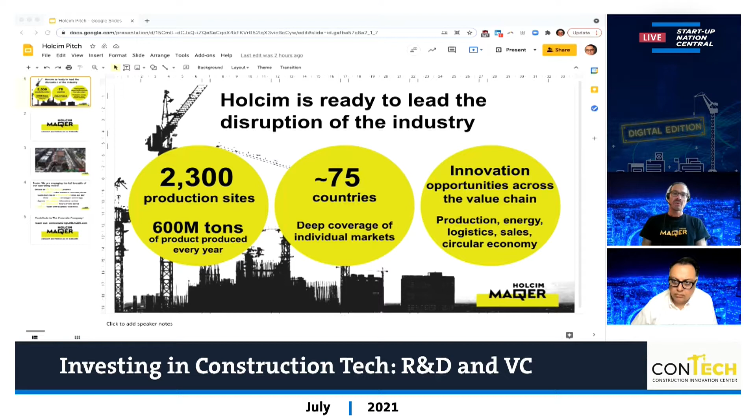We can only solve that challenge if we build greener, smarter, and for all. As Holcim, we are well positioned to disrupt how the construction industry will build in the future. With more than 2,000 sites globally and representation in more than 70 countries, we cover the full value chain - from the quarry to the cement plant, the whole supply chain to the construction site.

With this, we are convinced that we can drive the innovation of the construction industry. Now, Pritesh, share with us what you think about open innovation.

Thank you, Bengt. Appreciate that. I think it's one of the key reasons why we at the company have established the MAQER unit, the Holcim MAQER unit, as we talk about. The idea behind the Holcim MAQER unit has been primarily to create a platform for members of the open innovation community to really engage with us on a very active basis.

What we've done here is rather than being a venture investor or a corporate venture arm that you may see in other large corporates, it's really to flip the model to become more of a venture client model, where we bring the vast scale that Bengt was just referring to, the large global footprint that exists within our network, and make it available to startups and innovative new solutions to help address the most pressing challenges within the organization. It's a way for these small startups or emerging players in various different areas to really be able to affect the entire industry rather than just one player.

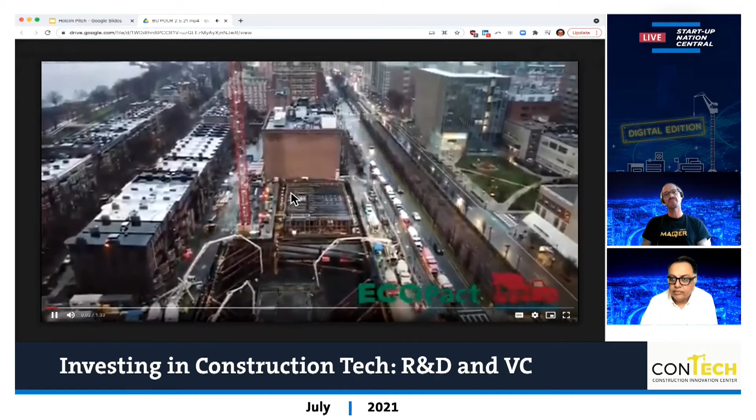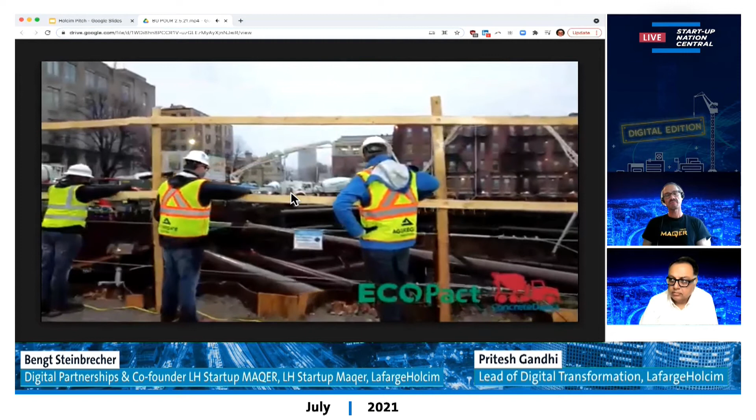We are here in Boston, Massachusetts, on the campus of Boston University, on one of the busiest streets in Massachusetts, on a very rainy Saturday morning. And it is a very large, more than 4,000 cubic yard pour of the ECOPact mix.

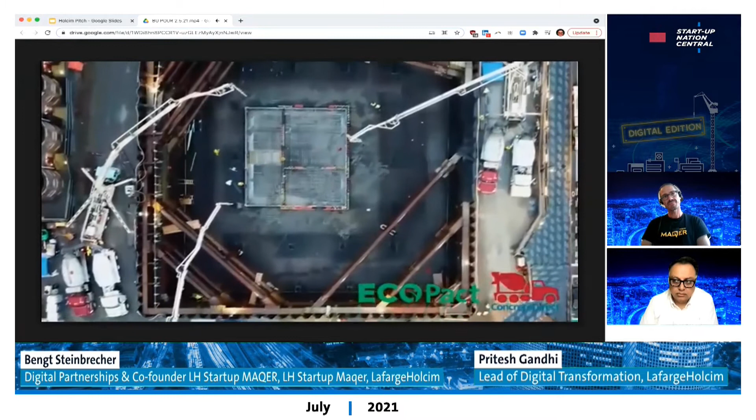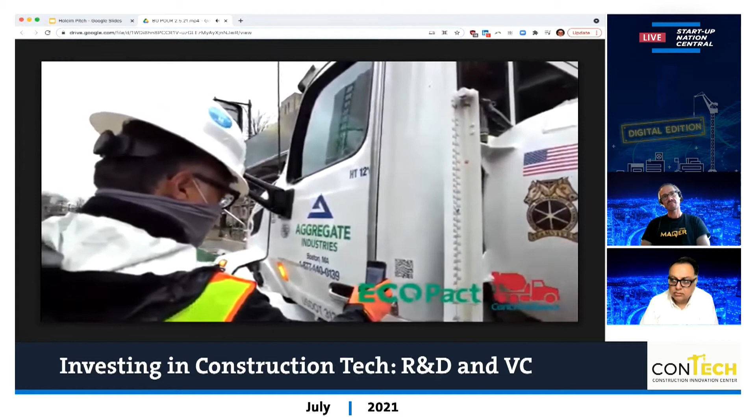With process and product innovation, we are able to make this one of the most sustainable pours LafargeHolcim has ever done. We have connected all of our back-end systems digitally, directly with the customer. So at their fingertips are every ticket, every truck, every status of every truck to ensure that concrete is delivered in 90 minutes or less.

Concrete Direct allows every one of the stakeholders to have their own view of each individual truck to allow them to perform their tasks independently and safely on a job site like this.

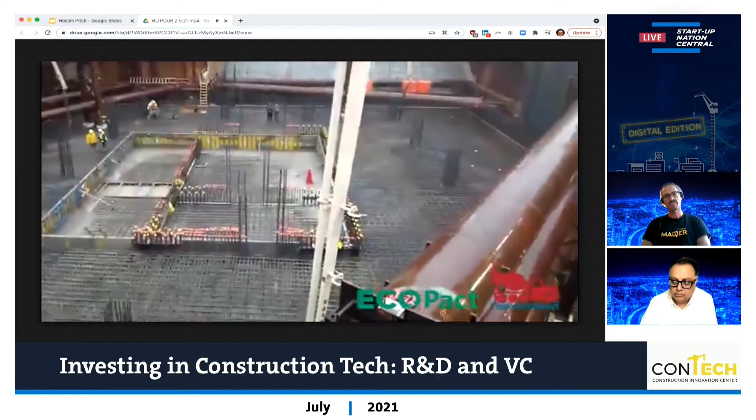At LafargeHolcim, our commitment to a sustainable future is stronger than ever. We are very proud to couple both product and process innovation at the Boston University Data Science Center. With ECOPact, this site has the lowest carbon product available as of today. And with Concrete Direct, the entire process was digitized without any paper whatsoever.

I think this is really a super cool example of how we are trying to combine product and process innovation in one platform and making that available for the customer. And I think also what was mentioned in the video about connectivity and how different data sources can be combined now in one way, making that available for different stakeholders to create more transparency and find more value-adding solutions.

So how does that now work for a startup? How can a startup collaborate with us and how can it leverage such a platform?

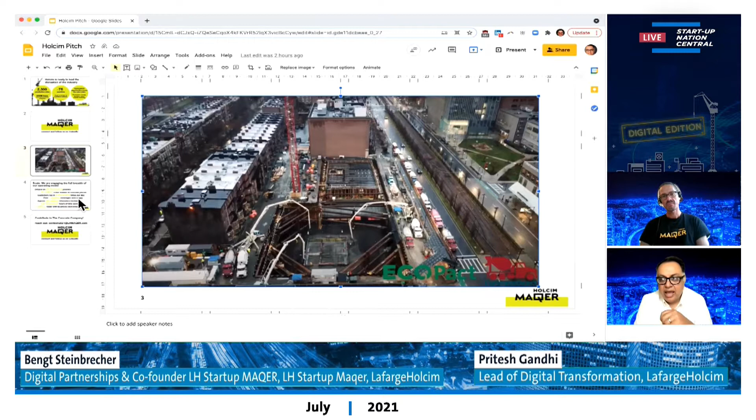So I think you all heard that this process we talked about in the video, as well as what we're doing as an organization, is again, as I said before, doubling down our commitment to sustainability. And what that means for us as an organization is we do have that product piece, which we are continuing to make big strides on.

But the startup community can really help us engage on the process piece. Many examples you might see in other industries that are analogous to us being able to deliver product and manage logistics and the very real-time supply chain that we have within our industry can really be applied to the kinds of challenges we have.

Being able to find opportunities to reduce wait time, create better products, reduce the waste that sometimes occurs at these kinds of sites, and eliminate a lot of this peripheral impact that occurs will also have a real impact on overall sustainability.

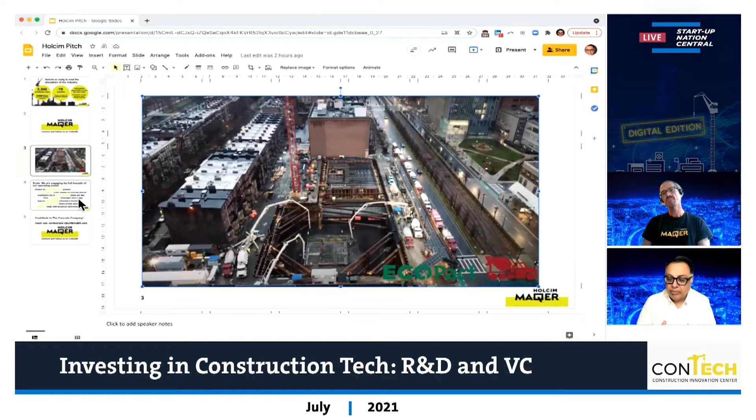So I feel like we have a very rich space for startups to come in and engage with us to learn how we can make a complex system even better for us to operate. But I think even more importantly, maybe, is the notion of scale.

What I find, as a previous entrepreneur running startups myself, is sometimes the challenge ends up being, okay, it's interesting, but it only applies to a small niche. Here at LafargeHolcim's Concrete Company initiative, it's really about offering our entire scale.

And being able to come in as a startup organization, as an entrepreneurial organization, to try to address the kind of scale that we offer, I believe is very unique. It gives you the opportunity to say, can we make a very rapid change within the organization by making these changes in the way that we use our operating model?

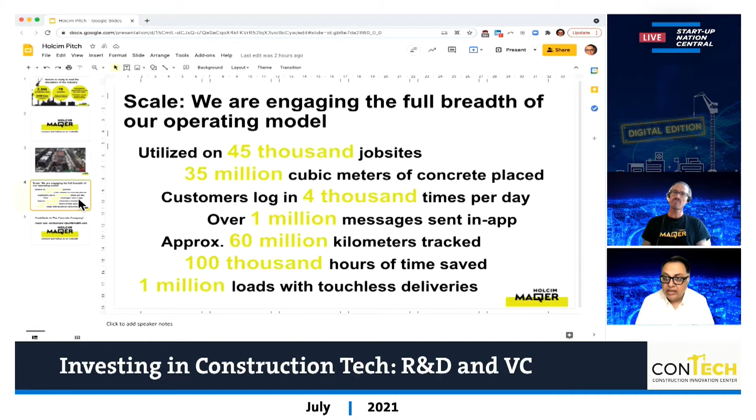So I think there's a lot of opportunity here. I'm very excited about being able to use our Concrete Company initiative to introduce new ways to understand data, to look at utilization, to look at productivity, to understand how we can better service our customers, and how we can ultimately create a better product for our users across the entire global footprint.

Wow, I think that's an amazing opportunity, and I think there are a lot of startups and investors out there who can now learn a bit more about these opportunities and see exactly where they can start to interact with the construction material industry. And I think that's the call to action from our side.

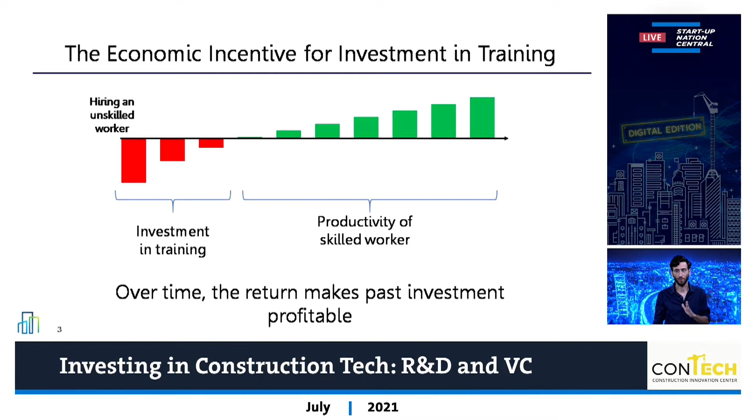I came to talk about the linkage between training and technology. I'm going to start with the rationale for the investment in training. The economic incentive for training is described in this graph. You can see in the chart that the red columns are the investment, the initial investment in a new unskilled worker. After a time, the investment starts paying off, and we can see it with the green columns giving the return on the skilled employee's work.

In the construction sector, things work a bit differently. It's fragmented, subcontracted. Every subcontractor has different employees and workers who come and go, starting with the foundations, ending with glass, glazing, finishing work. The general contractor does not employ the employees directly, and he basically doesn't even know them. And it is trivial to say that he has no incentive to invest in their training.

Also, the subcontractors have a very low incentive to invest in their workers' training. First, because the skills in the construction sector are transversal - it means that if you know how to put tiles, you know how to do it for any employer at any site. Also, after you've become a skilled tiler, you can go to self-employment and say bye-bye to your old boss with very, very little constraints.

The short-term employment in the sector means there is a very short-term planning horizon for HR, and the volatility of the business model means that when there's enough work, you can't spare even one day of work. But when there are not enough projects, then the workers just find other solutions with other employers or other sectors. And the low margins of subcontractors are detrimental to creating investment in training.

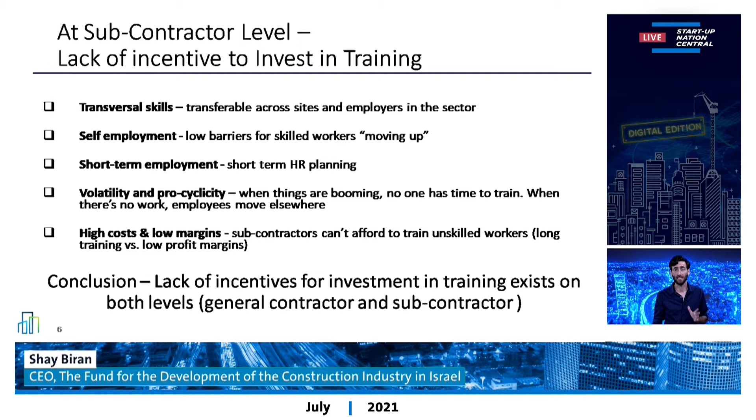So there's a lack of incentive to invest in training for both general contractors and subcontractors. But this is a lost transaction for the individual employer. As you can see, that doesn't necessarily mean it is a lost transaction for the entire sector.

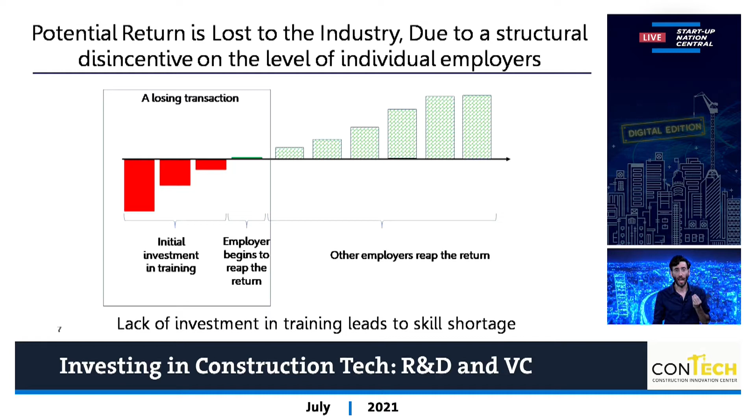You can see the known chart from a few slides ago. We have the investment in the red columns. We have the return for the employer in a short green column. And then the rest of the columns are basically what other employers would gain from a skilled employee moving in the sector. But the initial investment will not happen because it's a losing transaction for the individual employer.

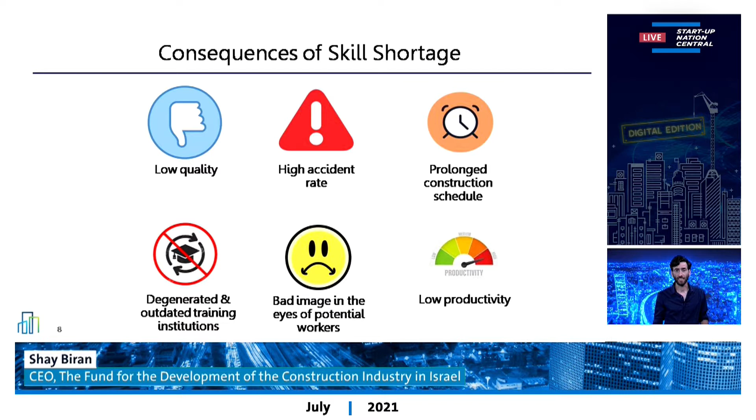This lack of investment is a market failure that creates a phenomenon called skill shortage. The consequences of skill shortage are quality issues, high accident rates, prolonged construction schedules, low productivity, bad image, and degenerated and outdated training institutions. With no incentive, there is no demand. With no demand, there is no supply.

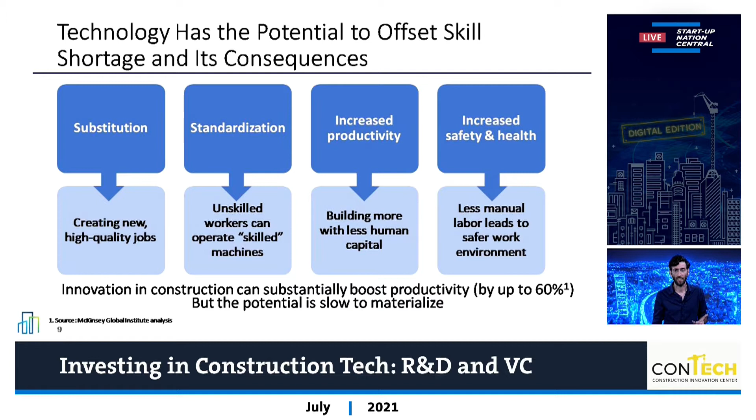And technology could offset the skill shortage and its consequences. It can create high quality jobs that will attract people who wouldn't come today. It can give unskilled workers robots and other automated facilities to operate without high skills. It can allow us to build more with the same manpower, and it creates a safer work environment because of less manual operations. So innovation in construction can boost up productivity, but this potential is very slow to materialize.

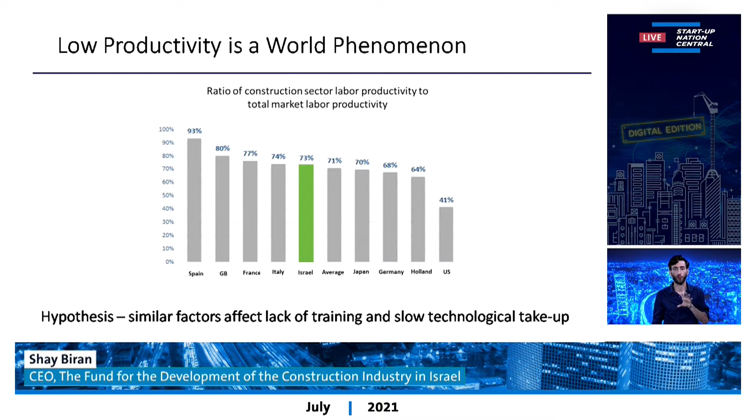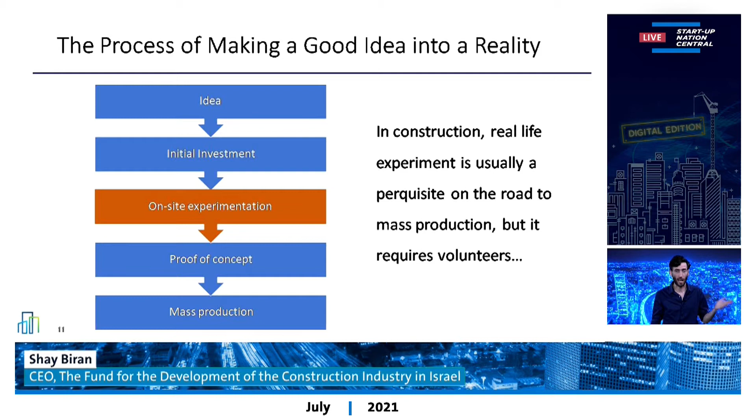The process of making a good idea into reality starts with an idea and ends with mass production. But on the way, there is on-site experimentation. And it's a prerequisite, because without experimenting somewhere, no one would buy your technological innovative solution. But for that, volunteers are required.

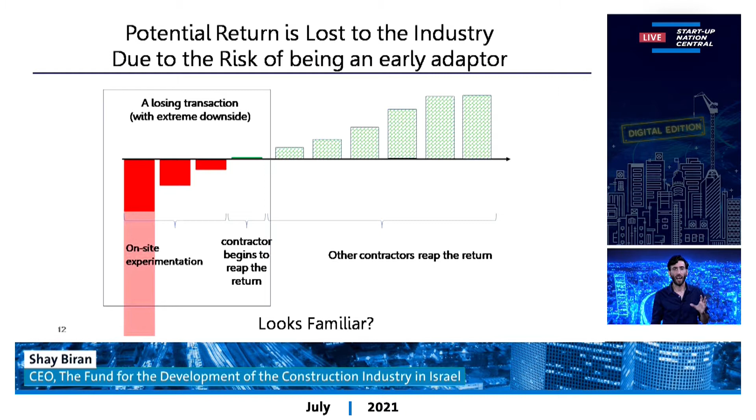And you remember this chart? The same as training, the initial investment is a lost transaction for the contractor who volunteers to be experimenting a new material or new technology. And when it picks up and starts gaining productivity and efficiency, the entire global economy will enjoy it. And it has a very extreme downside, because a new method or material in a project might create bankruptcy for contractors. It means that it's not that complicated to understand why things are so slow to take up.

Sectoral institutions can act as accelerators, creating more innovation and even attracting global capital.

ConTech, which we know, our greenhouse that takes entrepreneurs into the sector and escorts them through the phases of creating a startup. Sectoral venture capital, which with expertise in construction technology, is something that we're working on right now and is very, very soon to materialize. A sectoral sandbox, a place where you can experiment both new training and new technologies and innovation in construction, giving it the chance to achieve critical mass in order to go to mass production.

And how about training itself? Training can become more efficient, boosting productivity using digital solutions, but that doesn't happen when there's no incentive to invest in training. And sectoral facilities with economies of scale can help it function.

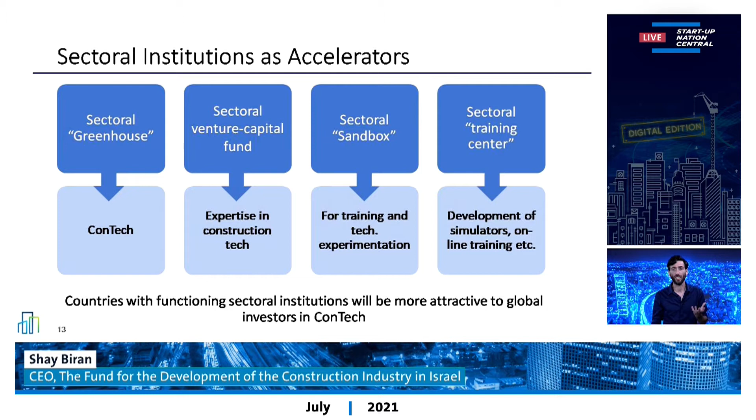And countries with functioning sectoral institutions can be more attractive to global investors who will have places to experiment new materials and technologies. Thank you. I was Shay Biran, about the linkage between training and technology in the construction sector.

Thank you, Shay. Training is undoubtedly one of the keys to successful technology adoption. And now, ladies and gentlemen, I'm very excited to present to you 4 entrepreneurs who made a long journey in raising significant funding, doing the first IPO of ConstructionTech here in Tel Aviv, as well as working together with the largest global construction companies. I'm proud to announce the first cohort of ConTech's Hall of Fame startups.

Let's welcome Tal Merizon, the CEO of Datumate. Tal has a vast experience in leading global growth stage startups, as well as mature privately or publicly owned high-tech companies. A strategic leader, Tal built a dedicated team of construction, civil engineering, geoinformation, and high-tech professionals, driving Datumate's leadership as innovators in the infrastructure construction space.

Yakir Sudry, the CTO and co-founder of Buildots. Yakir and his 2 counterpart co-founders are graduates of the Talpiot Elite Program. He served for 10 years in the IDF's Intelligence Corps, leading R&D teams and groups working on complex cybersecurity systems. Leading Buildots' R&D division, Yakir and his team developed an AI and computer vision algorithm that creates a digital twin of the construction site, documenting every detail of the construction process.

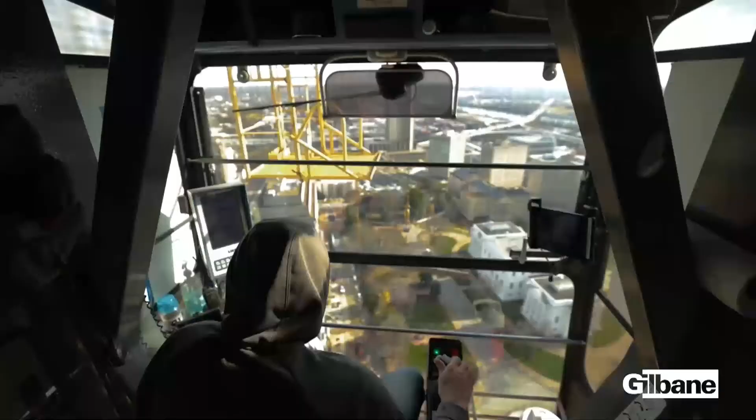Construction is really manufacturing, and job sites are factories. What if we could non-invasively get the data that we need to help people control the process? We zoned in on the crane because it's almost like a control tower at a busy airport, and by going under the hook, we serve in a very non-intrusive way that naturally fits into workflows.

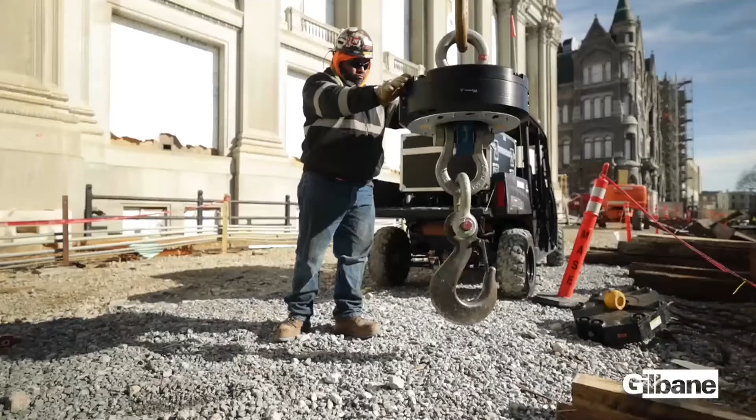The multi-sensor approach under the hook really tells us the story of the job site. We're here to change sequences of events.

I've always been amazed by the leadership and the innovation of the different teams I've interacted with at Gilbane. The team that we serve right now has done incredible things with the data. I can always see the best practices that shine out.

When the equipment arrived to the job site, it was just a matter of plug and play. Once the device was raised up, it was all go live from there.

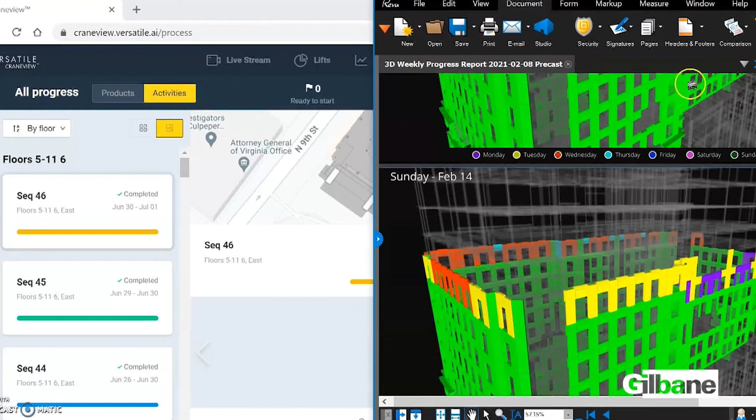CraneView data comes to us on a daily basis based on the work performed the previous day. The daily digests are a great tool to see how effective we were in the field the previous day and what things we may need to change on the following day.

I get a daily email with a digest that tells me right off the bat how efficient they were, the utilization percentage. If I'm hoping to see something in the 90s and I don't, I will dig deeper.

There's different data that we're able to get so we can see if there's any outliers. So we're able to go back and look at the camera footage, decide if this is something we're possibly going to see over and over again. We're allowed to then plan around that.

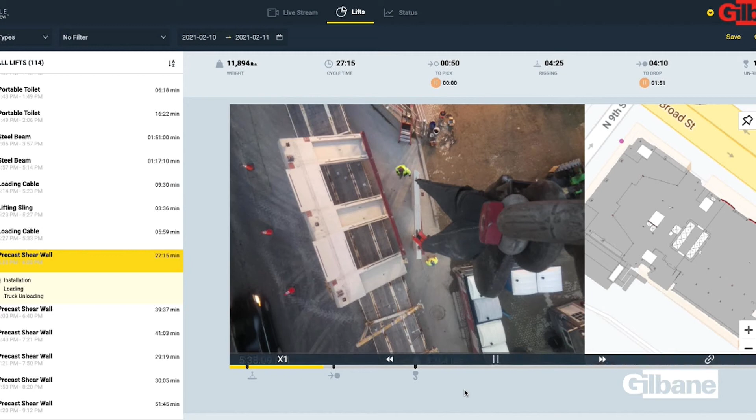So I think a combination of getting the data in email form and then watching it real time remotely allows me to still be connected to the work.

Being as safety conscious as we are, I think having the ability to look right down on top of the connectors, the riggers, the guys hooking the stuff up on the ground, if you see something like that, then you can get something corrected.

As a safety director, I'm able to use the information, the data points, and the video from CraneView to identify training needs and best practices, lessons learned that we can utilize on our projects for not only our Gilbane employees but also our contractors. The data that I'm able to collect is really transforming our ordinary into the extraordinary.

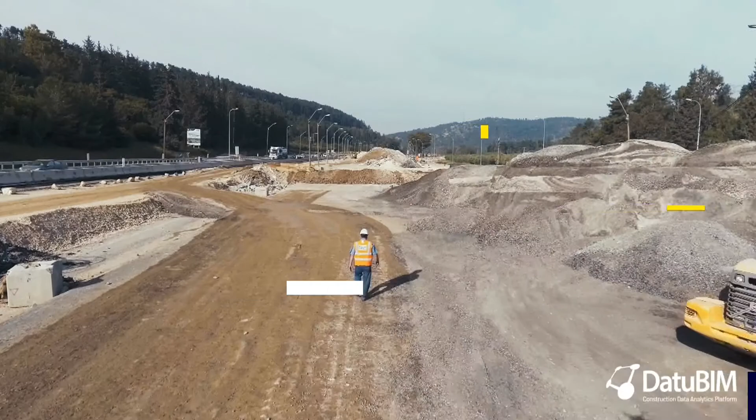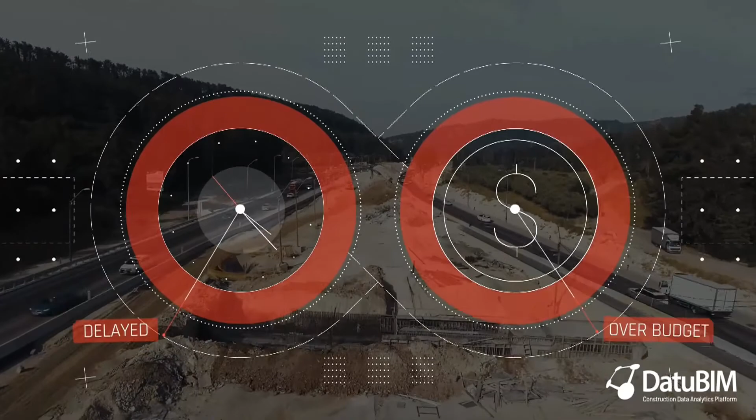Managing infrastructure construction projects is a race against time and a fight against deviations. Basing decisions on outdated information can cost you dearly. DatuBIM captures field data via drones to deliver critical metrics and actionable insight you need to better manage your site.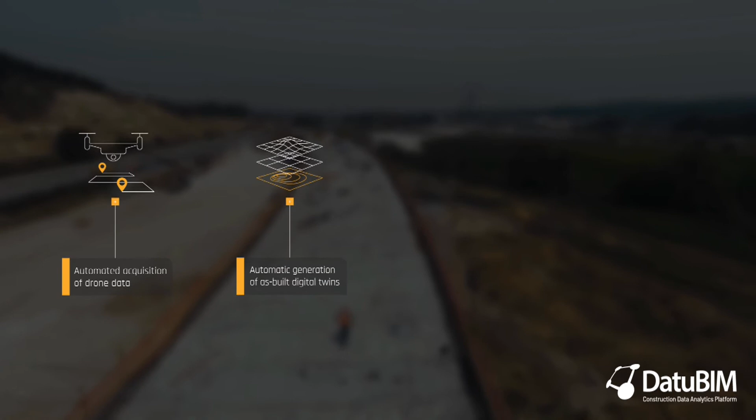Gain visibility with accurate, constantly updated digital twins of the as-built. Uncover deviations and solve problems promptly. Improve efficiency. Save time and money with our automated end-to-end process.

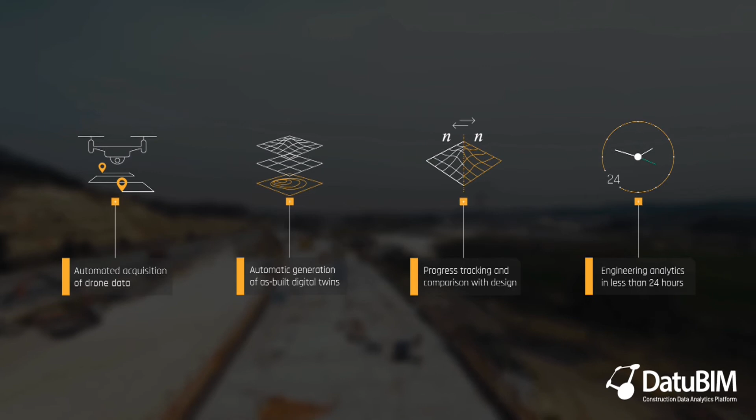DatuBIM checks every box. Visualization of work progress, visual inspection and quality assurance, comparison of actual to plan and cross-section delta reports, tracking of volumes, earthwork, schedule, and budget, digital documentation of the entire life cycle and custom reports.

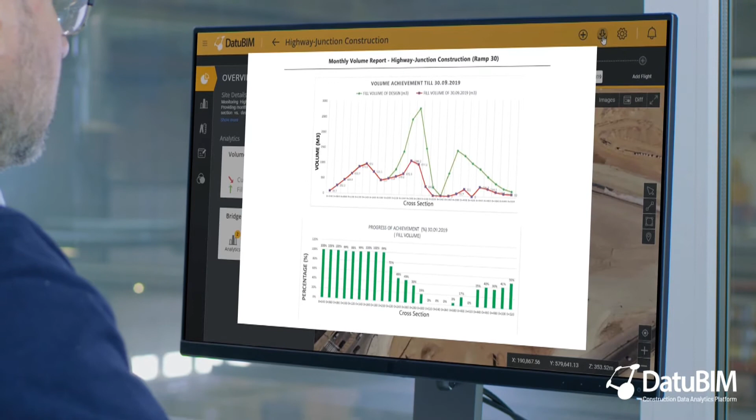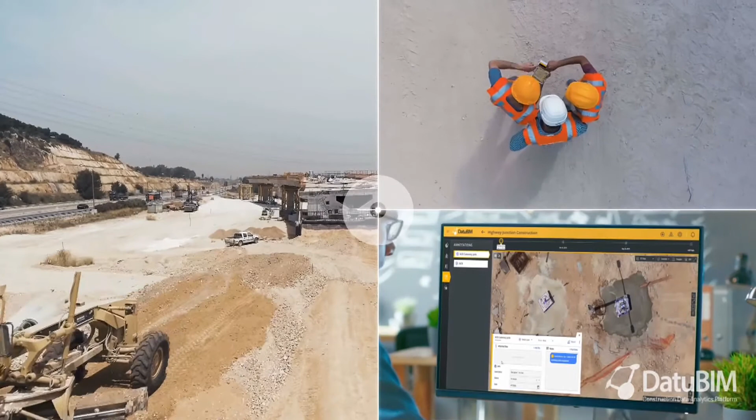With our secure cloud-based software, you have all your project data and analytics when and where you need it. Easily share insights across teams to improve collaboration, to solve problems more efficiently and faster. DatuBIM, making construction data work for you.

When working on site, one of the biggest challenges I found was having enough hours in the day to deliver the project, but also communicate effectively with the team and keep the right type of records. For sure, if my previous project teams and I had had access to Buildots, our life would have been a lot easier. I'll always remember from my first weeks of working with Buildots, one of my clients told me, 'This is the future,' and I agree with him. But enough about me, here's a video which shows what Buildots is all about.

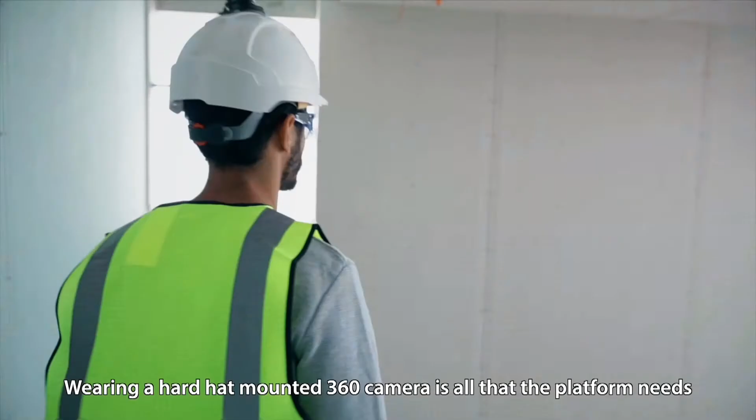Managing a construction site is a huge challenge that requires complete control over tens of thousands of details. With Buildots, capturing progress data is as easy as doing a site walk. Wearing a hard hat-mounted 360 camera is all that the platform needs to create a digital twin of your construction site, documenting every single detail of the construction process.

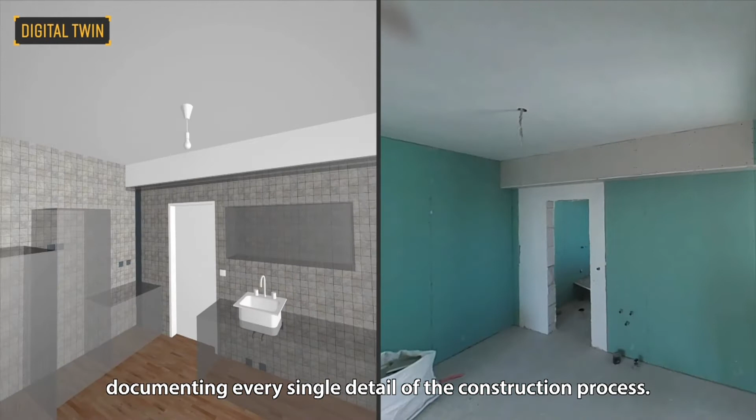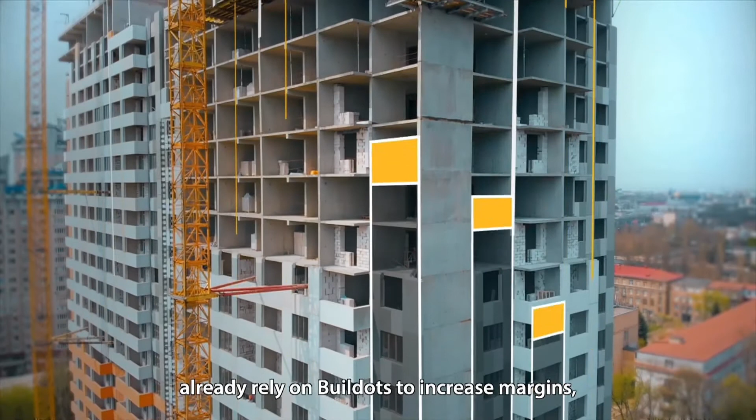Based on this digital twin, the Buildots Control Center app gives you detailed reports and a comprehensive view of your project to help you manage your resources and avoid delays. Deviations from the schedule, incorrect installations, and partly completed tasks are all flagged instantly, making sure you're always in control. From weekly trade meetings to monthly valuations, Buildots is specifically designed to suit your existing workflows. Leading construction companies across Europe already rely on Buildots to increase margins, boost productivity, and get ahead of the competition. Book a free demo today at buildots.com.

Hi everybody, my name is Pascal and I am the construction lead for Buildots UK. My background, I used to work in the construction industry. I worked on site in New York City for multiple years. My main observation was the fact that technology wasn't being adopted on site as much as I wanted it to. So I wanted to be part of that change, and hence the role of Buildots, which has really opened my eyes to bringing technology into the construction sector.

So Buildots offers a change that I've never seen in construction. I know that for a fact. What it does is it gives you a level of objectivity that I don't think the construction industry has ever had, and it allows you to look at a site team objectively without any bias and really make a difference on how your projects are run.

The data that we collect is objective, but also in the fact that how we use that data in terms of the program, the scheduling, and the error detection within our system is all ways that really are changing the industry for the better.

So when I first heard about Buildots, I sat down with one of the co-founders, Aviv, for an interview for the new job, and he showed me a bit of the tech, and I genuinely couldn't believe it. I didn't think it was real, because I'd been looking for this sort of solution for so long in my old role that suddenly it was presented to me, and it almost seemed too good to be true. And it turns out it's not. It's real, and it's actively deployed on sites all over the world right now.

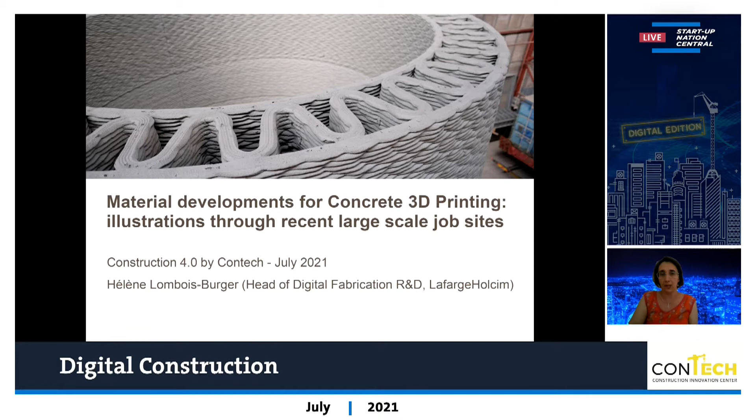Hello, everyone. It's my pleasure to have been invited to talk at Construction 4.0 event by ConTech. I'm Hélène Lombois-Burger. I'm heading the R&D on digital fabrication at LafargeHolcim, and I will discuss with you recent material developments we made for concrete 3D printing, and I will illustrate this through recent large-scale job sites that we did with our partners.

Our belief is that 3D printing is to be used when it brings additional benefits versus reference construction technologies. And we see four main benefits.

The first one is material efficiency. You have the ability to place exactly the right material at the right place, so it means that you can save up to 60%. You see here an example of a bridge application by a Dutch startup, but you have plenty of other bridge projects. I will show a few ones, and they all land on the same figures typically.

The second one is the ability to increase construction speed and productivity. Construction is suffering a productivity gap. It's one of the industries that has least enhanced its productivity since World War II. And with 3D printing, you have the ability to print and build up to twice as fast.

The third one is flexibility and scalability. You can do mass customization without any overcost. You don't have to amortize a mold over large series, so you can do one-off designs without extra cost. And the last one is reduced logistics for large parts, avoiding the transportation of pieces larger than 4.5 meters, which is usually difficult on road.

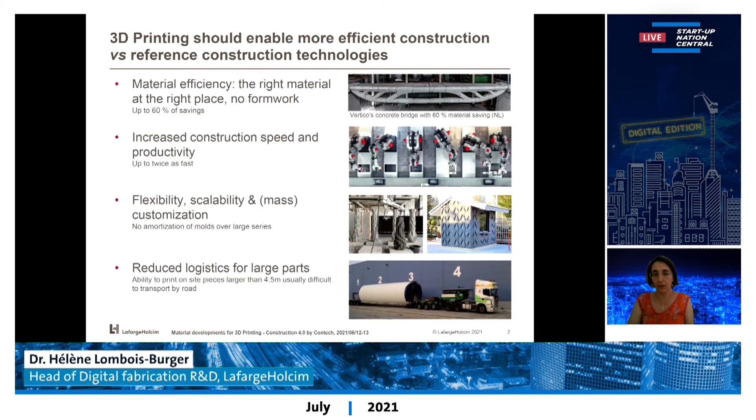Beyond this, you have additional benefits, be it in terms of health and safety or whatever. And the way we do it is we try to work in an open innovation approach to address the whole value chain. Indeed, the design should be application- and manufacturing-informed. Instead of having something sequential, you deal with everything at the same time.

The development path starts from the application. You will decide what you want to print. Is it a bridge? Is it a wall? Is it a slab? Then you pre-design. You need to review your design for 3D printing to optimize it. Otherwise, if you just copy-paste usual designs, it will never fly. Then you will select the print technology best suited for your application.

If you want, for instance, a large volume, it's better to have a gantry. If you want to make very complex shapes, it's better to have a 6-axis. And then you will develop the material to have something that copes with the specifications from the application, the design, and the manufacturing technology. You have a few key challenges associated with 3D printing.

The first one is fresh stability. You will have slanted structures, narrow and tall, with no formworks to support them, and you don't want your layers to collapse when you deposit the upper ones on the lower ones.

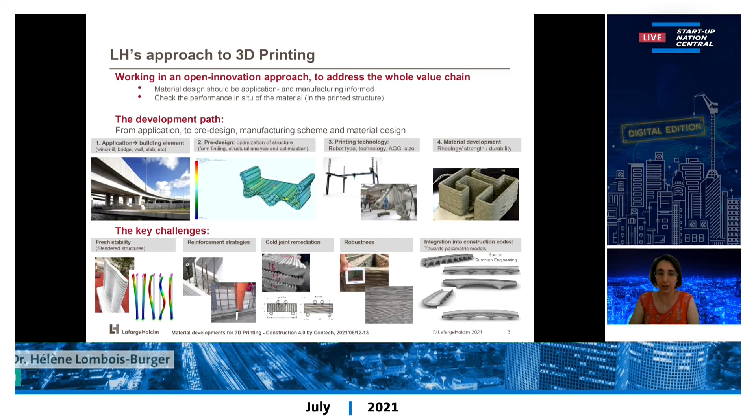Cold joints is a brittleness between two successive layers, occurring if you took too long to print the upper layers on top of the others. There are some remediation solutions to this problem.

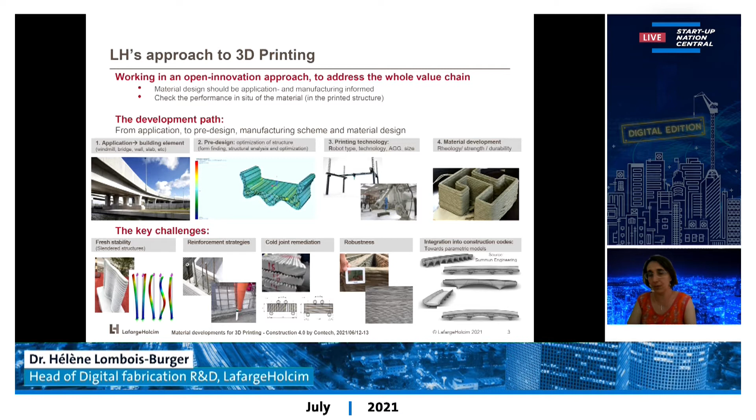Next, you want to be robust. Whatever your environmental conditions, be it cold or hot, with high or low moisture content, you want something that will produce the same printed structure and be crack-free. Last but not least, since this is an emerging technology, you want it included into construction codes, which means developing parametric models to make it easier to get your design accepted.

So LH has developed two main products in its material offer. One is what we call one-component materials. In that case, you mix a dry mortar or dry material with water, and after mixing, it's directly printable. The second case is a two-component material.

In that case, you make a first mixing of the dry material with water to have something fluid, which means it's easily transferable and pumpable. It's only in a secondary mixing step, occurring in the printing head just prior to extrusion, that you add the secondary component, giving you the printability behavior. This second way is more flexible because you can adjust material properties on the fly, but it requires a specific nozzle to get this printable mix.

The solution we have developed encompasses various options, be it in terms of strength, from low strength 15 MPa to high strength 90 MPa, or in terms of maximum aggregate size, in case you wish to focus on aesthetic properties, you will have rather micro mortars.

If you have a limited width, you might go to mortars to improve your environmental footprint. And if you have wider elements for a further enhanced environmental footprint, you will go up to concrete, and this will require some specific process solutions.

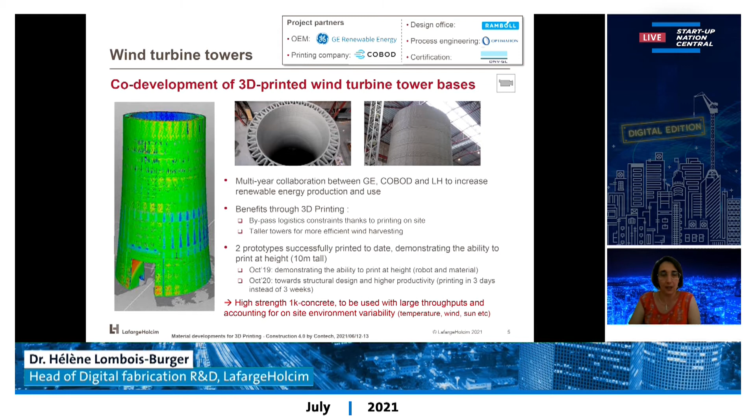In that case, what we are developing as a material is a one-component, high-performance concrete, with the aim to reach very large throughputs and be robust to on-site environmental variations like temperature, wind, and sun, which can generate temperature gradients and so on.

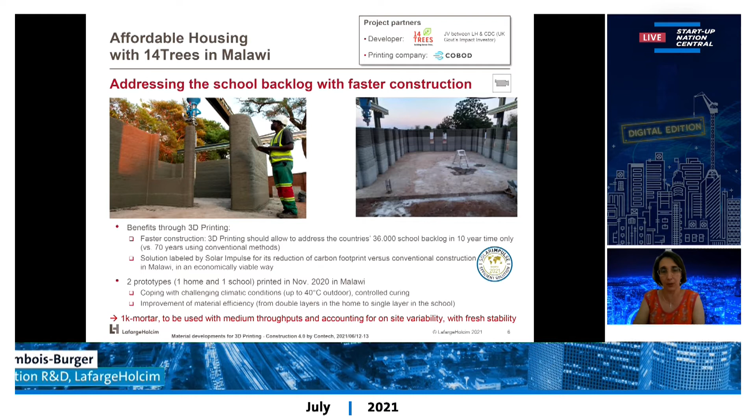The second example is related to affordable housing. It's something we do with 14Trees, a joint venture between LH and CDC, still with COBOD as the printing company. What we target here is faster construction. Malawi is suffering a backlog of 36,000 schools, and it would require over 70 years with conventional construction methods to bridge it. With 3D printing, it could be possible in only 10 years' time.

The solution was labeled by Solar Impulse, both for its environmental impact and reduction of carbon footprint, but also for its economic viability. Two prototypes were printed in November 2020 in Malawi: one a home, shown on the left, which has a double layer wall you can't see directly in the picture, and on the right a prototype of a school printed a few weeks afterwards, trying to further improve the environmental footprint by going towards a single layer wall that is nevertheless still stable.

We made no use of the cavity wall, as no formwork installation is required in that case. So we developed a specific design with a crenulated shape that allows you to furnish your building properly, have new functionalities, and have something that is stable.

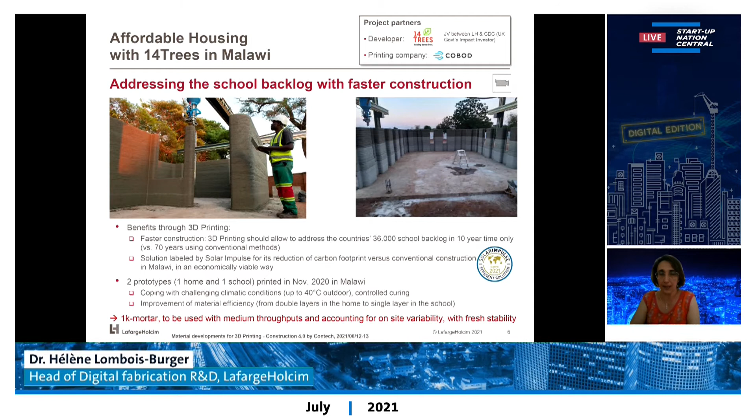We had to cope with very high external temperatures and control the curing. In that case, what we use is a one-component mortar with lower throughputs than the wind turbine tower application, and we still need to manage on-site printing conditions.

I will just show you a short video about this printing.

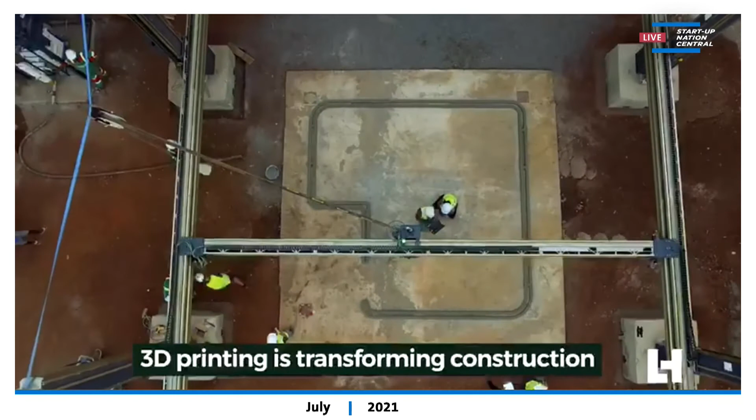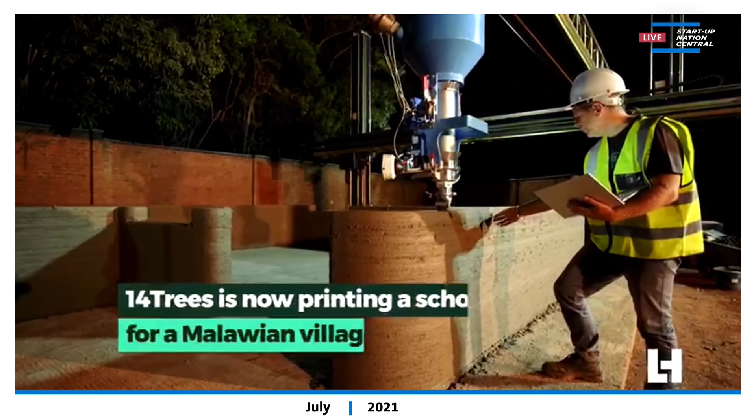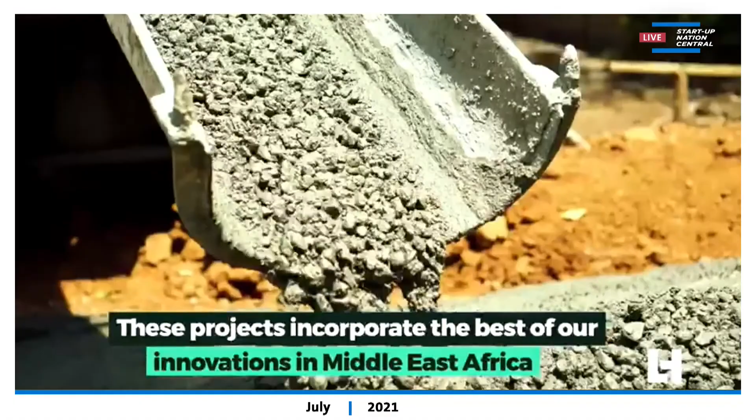So you can see the slab on which the home is printed and the gantry printer. With the mortar that is printed, you see here clearly the double layer design. And you see that the robot was piloted by local people. It was printed typically at night because the temperature was so hot. You had just sent the connectors in between the two layers typically that were made, and it's also included some other products from LH.

So now I'm going to discuss the first bridge project that we had. It's a bridge intended for the Paris Olympic Games 2024. In that case, as I mentioned earlier, what we target is better efficiency in terms of material savings, with up to 60% of material savings, because we optimize the cross-section of the bridge, putting the largest parts only when needed.

So the consortium won this tender in 2020, and the ongoing R&D phase intends to optimize the interaction between the material and the process, and to improve the materials to further decrease the environmental footprint.

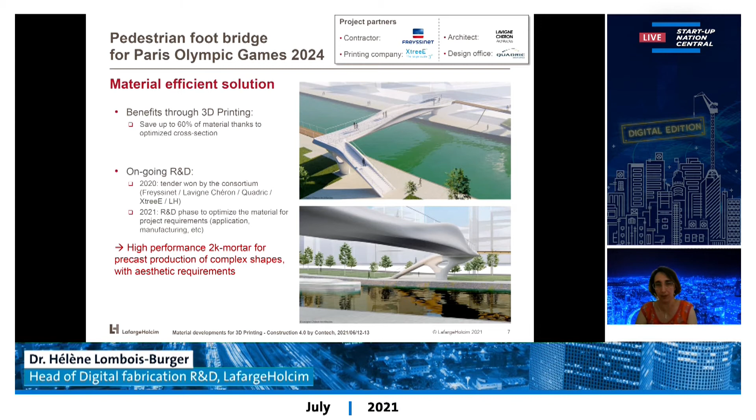Given the complexity of the shape we have, with a honeycomb shape that could never be produced without 3D printing, what we leverage is a 6-axis robot, using a high-performance 2-component mortar, because we want to produce these very complex shapes with quite enhanced aesthetic requirements. You may see here the renderings done by the architects.

The last project is a second bridge project, a pedestrian footbridge, that will be displayed at the Venice Biennale this July.

So this time, once again, we optimize the material use. The design is based on masonry, and the idea is to use the bridge in compression only. The former bridge used post-tension to get the required load-bearing ability. In this case, there's no steel anywhere, just the printed, 3D printed mortar. The blocks will be assembled dry-stacked, meaning you have the ability to disassemble the bridge. If you want a circular element, you can reuse the bridge somewhere else.

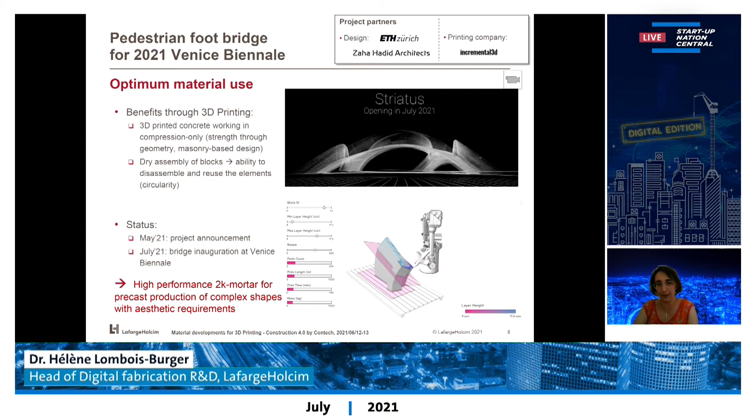The project was announced last May and will be displayed this July. Once again, what we used is a 2-component mortar. You can see we have some large overhang parts, so it's very important to have this 2-component ability to achieve these overhang parts, with very high aesthetic requirements, and the way it looks is like ceramic typically on the surface. And that's it.

It was really my pleasure to be invited to this Construction 4.0 event by ConTech, and I hope you enjoyed these elements about 3D printing of concrete.

Hélène, 3D printing is such a new technology and has, just like any building technology, its strengths and restraints. How do you give them tools to design for this technology?

Thank you, Aviv, for this very good question. It's true that as 3D printing is presently outside of construction codes, we need to enable architects and designers to leverage all these benefits and learn from previous projects. One of the best ways to do it is to try to create parametric tools, so that once you have created a first project, you have the ability to adjust the design to your specific new project, including all the design rules from your former project.

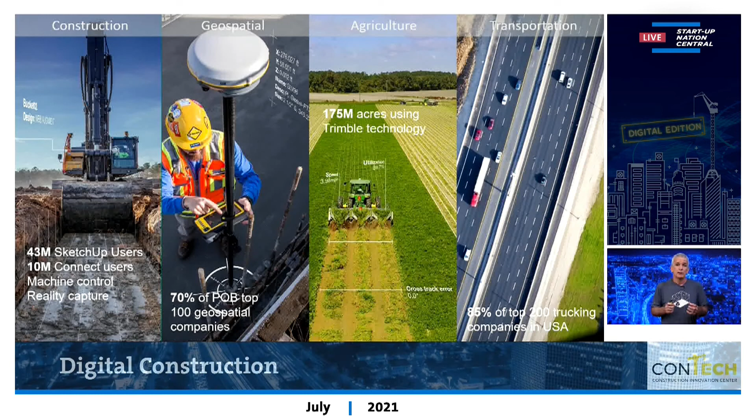A core value for Trimble is to deliver integration - integration of hardware, integration of software solutions, and integration of business processes for our customers as a means for efficiency. This brings us back to the image we started with, but this time with some references. On the bottom right, we see a typical organization in the finance industry, very centralized information flow. On the top right, we see manufacturing with a bit looser structure. And on the left, the chaotic construction industry.

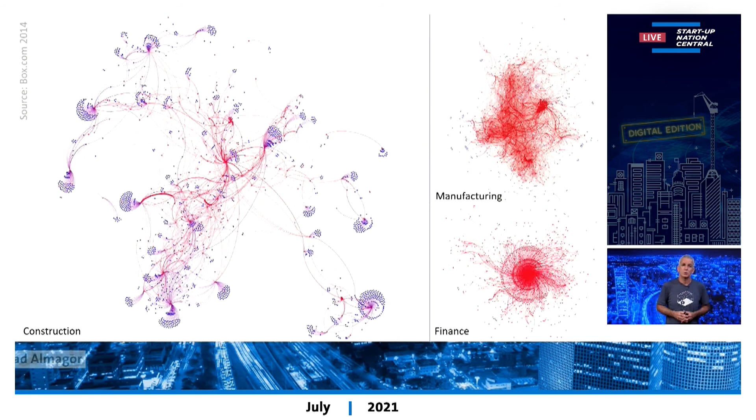If you think about it, it's a natural path, a natural structure, because construction is a local industry. We have local owners, local authorities, local regulations, subcontractors, contractors, manufacturers - they're all local, and the project can be anywhere around the world. So we cannot change this structure. We might be able to offer prefab as a partial solution, but what we can do is utilize technology and create a digital transformation process that will help us take the efficient information flow we see on the bottom right and implement it on top of this fragmented construction industry structure. This change can transform a complete efficient process.

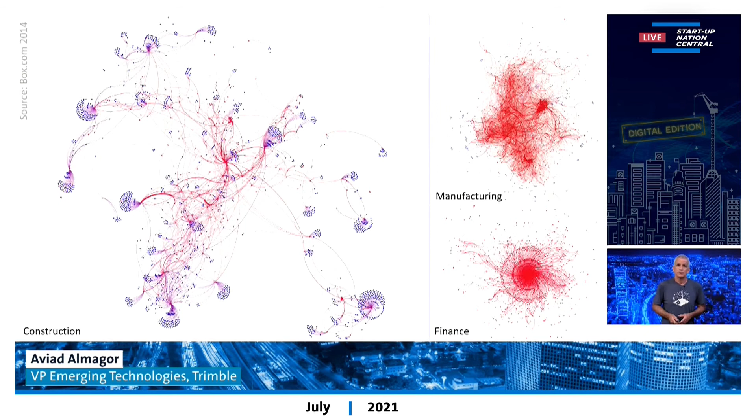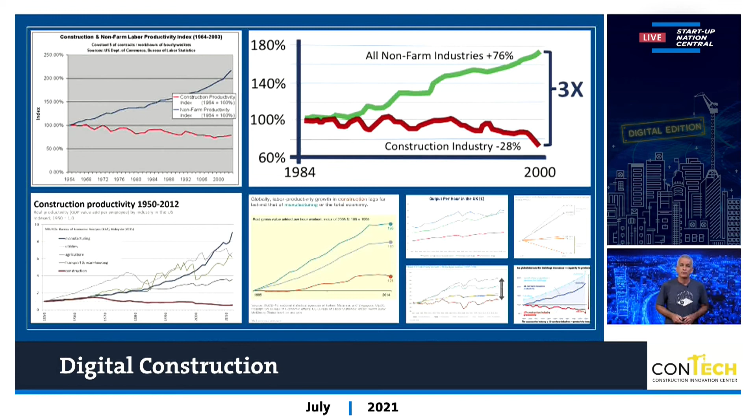Now some of you might ask why this will work today. We are all familiar with those graphs about the productivity of the construction industry. There's no need to read the small letters - always follow the red line at the bottom. With some optimistic scenarios, it will be a flat line. With more pessimistic scenarios, it will just go down and increase the gap compared to other industries. So why do we think things can happen differently at this stage?

So once we have those enabling technologies, we can start to look at more specific technologies. What is important here is not to look at each of them as a single specific technology, but to look at them as a whole, because once they work together, we can deliver efficiency.

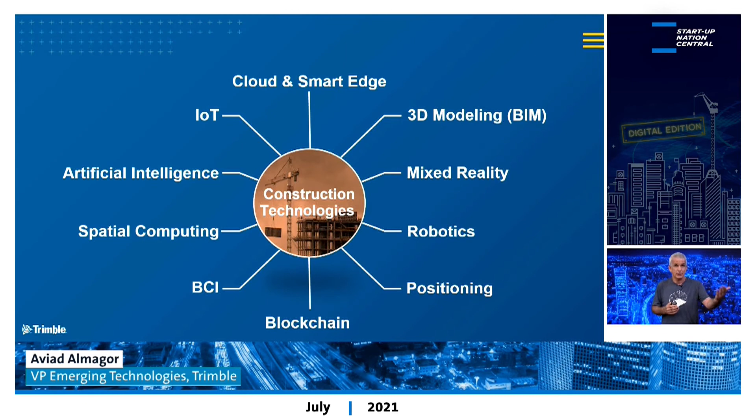Take a look, for example, at BIM, but not the lonely BIM, but a collaborative, cloud-based BIM solution to improve communication and transparency. Or mixed reality, which brings together the digital and the physical world to improve the ability of users to understand the relation between the two environments. Robotics for automated workflow, brain-computer interface to improve the interaction between humans and assets, digital and physical. And of course, AI with its ability to predict and prescribe solutions.

So when we are talking about integration, we should look at it from horizontal integration and vertical integration. On the horizontal side, supporting the full workflow from design to construction to facility management. And on the vertical side, supporting all stakeholders, ensuring that data flow is effective and supports the decision-making process. And it's not just about horizontal and vertical integration, it's also about integration of business workflows. Those are critical for a successful integration and implementation of the technology.

As an industry, we are great with collecting data on site. We have GNSS, we have drones, we have IoT sensors, cameras, robots, humans collecting data. And we have the cloud infrastructure to absorb the data and process it, and then the edge solutions on finance and operations and logistics to really help decision makers do their work. What we should improve is the linkage between the different stages. We should automate the data flow in order to get real efficiency and real transformation of the industry.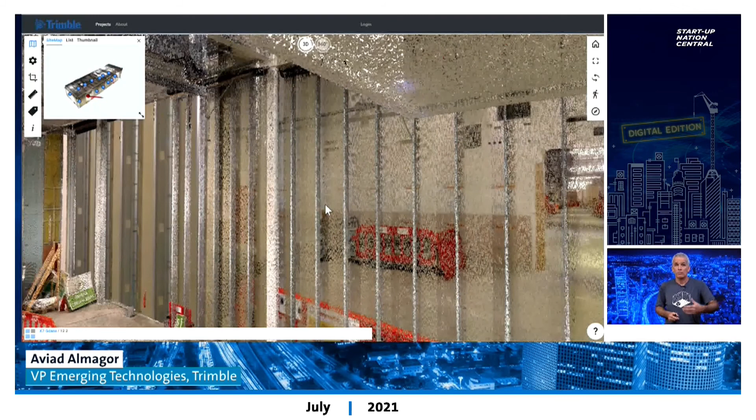I would like to give you two examples. The first one is about a 4-legged robot equipped with a reality capture device, a Trimble scanner, collecting data and uploading this data to the cloud. What you see here on the screen is a Boston Dynamics Spot robot with an integrated solution to capture data in a construction site. Once the robot finishes the collection of the data, it will move to the next waypoint completely autonomously, and the data will be uploaded to the cloud.

So decision makers, designers, owners, anyone involved in the project can actually visualize the progress on site and understand and take decisions based on the input from the site, almost in real time.

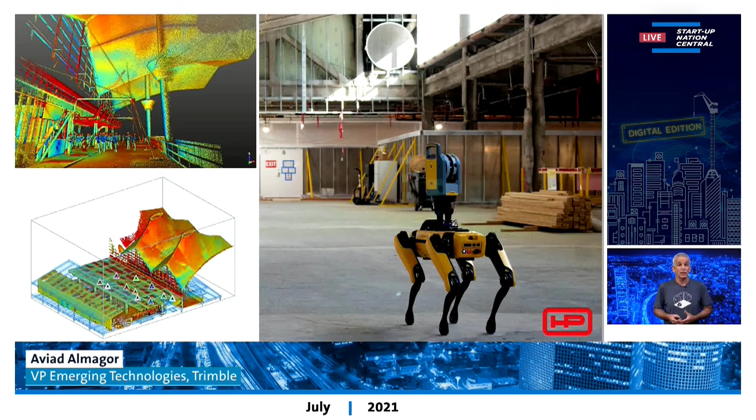We can take this concept further and start evaluating the data we collected and compare it to additional information, for example, compare it to a BIM model. On the screen now, we see a use case from Hensel Phelps, a strategic customer for Trimble. In this project at the Denver airport, a renovation project, they took the scan data collected by the robot autonomously and compared it to a BIM model to identify any discrepancies between the two early on, in order to avoid delays in the project later down the road.

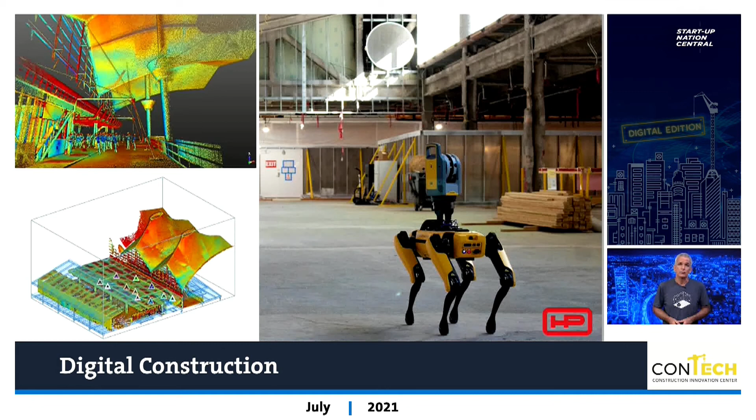Another great example for integration is mixed reality. In this case, we bring together the BIM digital content and the physical environment, and we place them aligned to each other, so on-site construction workers can evaluate the relation between the two and identify any discrepancies or deformations. This information can also be shared with remote users, and actually we can offer them the opportunity to completely immerse themselves in a remote site and understand the situation in real time.

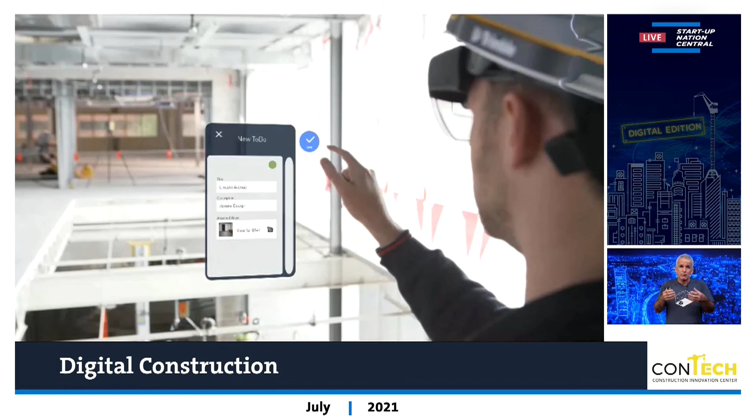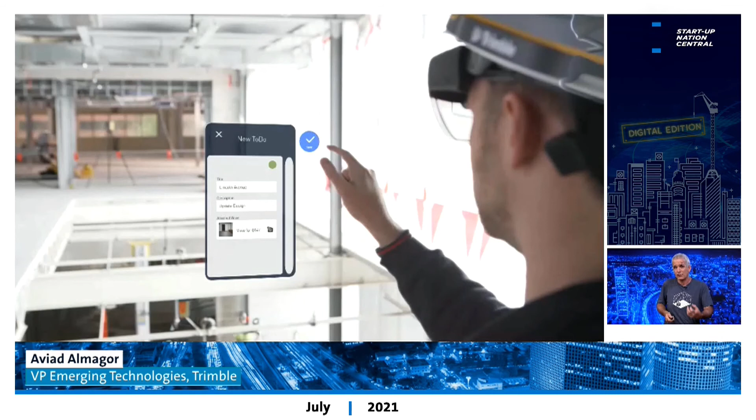Those two examples present not just integration of hardware and software or business workflows, they represent an integration of the industry as a whole, from design to construction to facility management stages. And this is where we can bring efficiency and transform the industry. A successful implementation of mixed reality can take us farther with AI. Using AI, we can create semantic models, better understand the environment, and actually reflect this by presenting delays in schedule or discrepancies from design in a visual way.

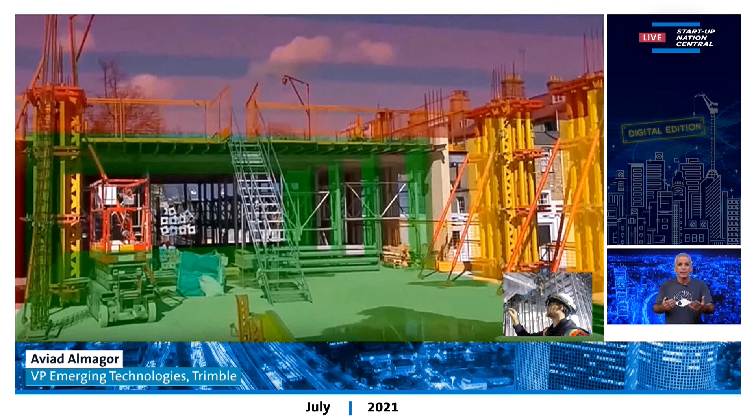Successful digital transformation and the kind of holistic views we presented here can really make a change, can deliver efficiency with improved productivity, transparency with all stakeholders engaged and involved in the process and having access to data. Traceability, a critical aspect if we are talking about improvements. Traceability can provide me the ability to go back in time and see where decisions were made, and learn to do better in the future.

Interactivity, the ability to simulate, to run what-if scenarios. What if we change the structure from concrete to steel? What will be the impact on the cost? What will be the impact on the schedule? What if we change the compactor pass? How efficient would this be from the fuel consumption point of view?

Predictability, and even take it further, prescriptability, the ability of the system to deliver solutions to the decision makers. And last, but maybe the most important aspect, sustainability. It is our responsibility as an industry to improve sustainability, to reduce the carbon footprint of the built environment.

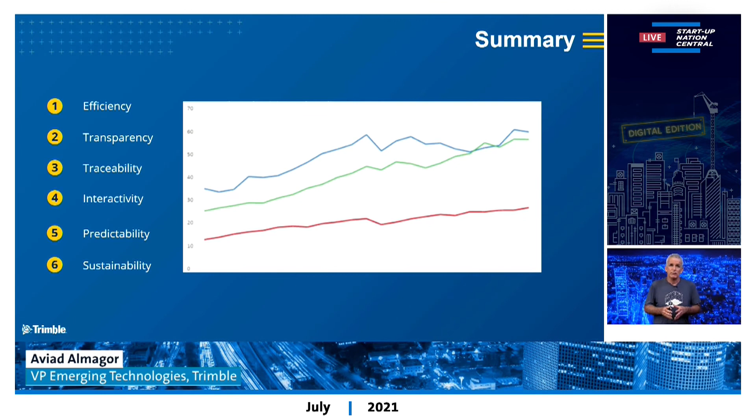A successful implementation might help us as an industry change the image of the industry from a technology follower to a technology leader, and improve productivity dramatically.

Thank you very much. Thank you, Aviad. By the way, how do you see the future of robotics at job sites?

That's a great question, and actually we are just starting this exciting journey. Our vision is that cobots, meaning collaborative robots, will work side by side with humans. It doesn't have to be just this four-legged robot we saw in the video earlier. It can be drones, cranes, dozers, anything which can be automated. Those robots will augment the human workforce and deliver the dull, repetitive, and dangerous tasks that humans need to carry out today.